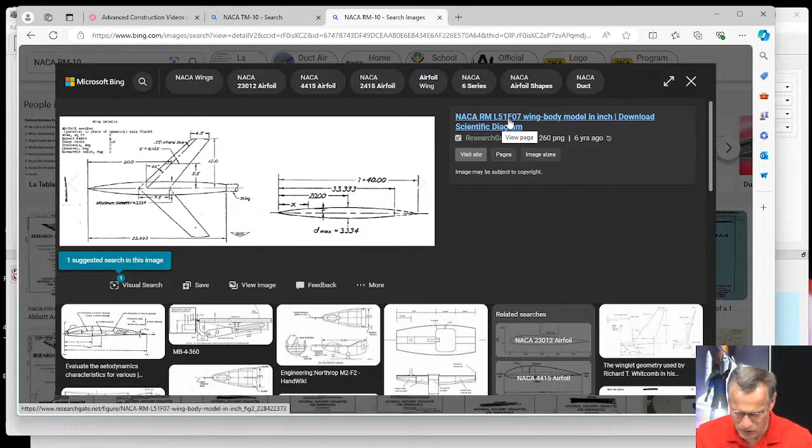What's this one here? RML51, it's a wing body model. The M2F2, that's a fun one - oh, we can't do that one in RockSim. What about this one here? Oh, that's another lifting body. That looks like the old National Aerospace hypersonic wave rider.

Terry asks, once I design a rocket, will RockSim alert me and say it's going to crash? Only if it's unstable. If it's stable, then you have to build it correctly.

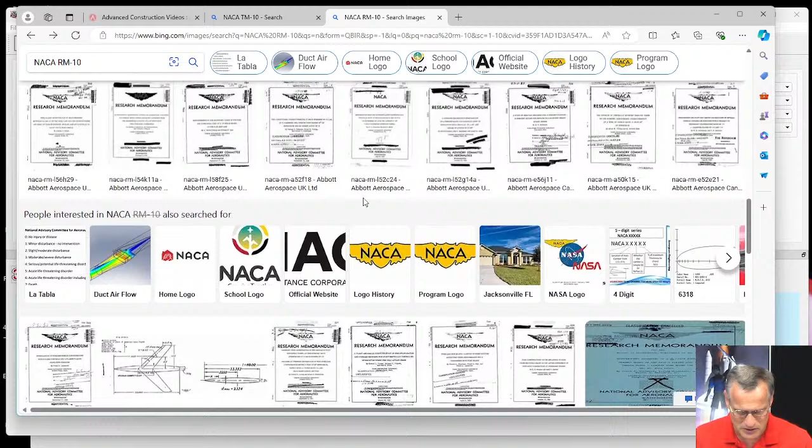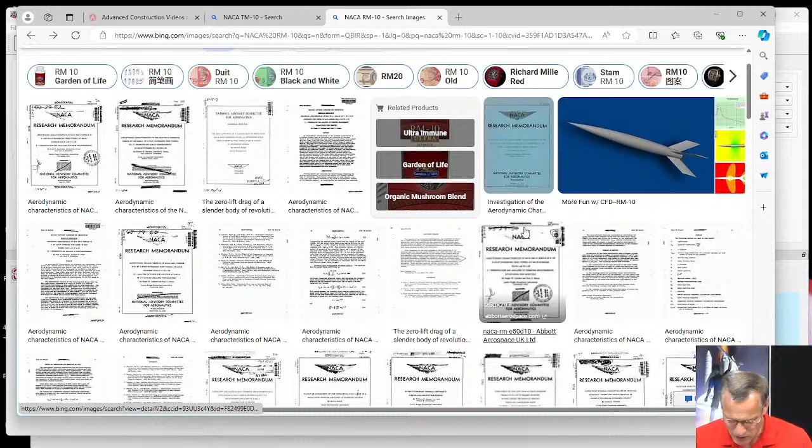There's a lot of NACA stuff here. I'm looking for this image, NACA RM-10. I'm not getting it - give me, if you know. What looked interesting was this one here, and this one - could you design that in RockSim? The answer is probably yeah, we could probably do that one. I'm just seeing if there's any RM10s here. Most all of these designs here can be done in RockSim. That one could probably even be done. That one can be done.

Let's try one, I'm looking for something interesting, so it's got to have a round body. Let's do a harpoon like that - let's visit that page. This is, somebody made a 3D model of it. The only question is, I don't know what the size is. They're selling this for $10. We could try designing this - let's give it a try.

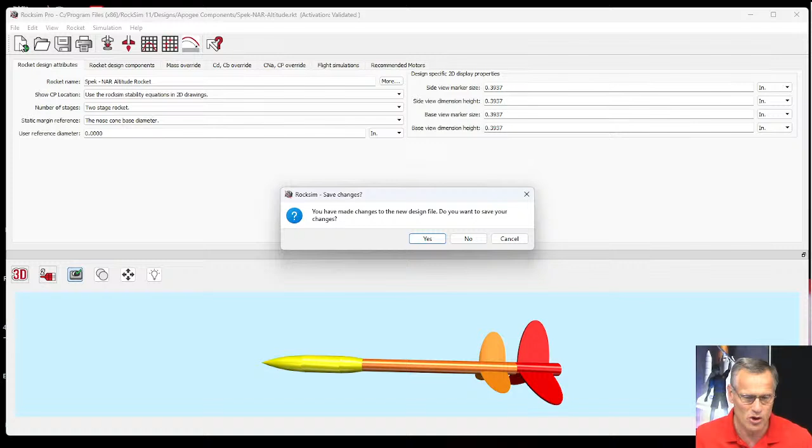So I'm going to go to RockSim. I'm going to be in RockSim Pro. Let me move this - oops, there's RockSim. I'm going to move this image from that screen to over here so it's not in the way, so I can see it, but you can't. Okay, to design a new rocket, we're designing a brand new one. Go up here to new, and it's going to ask if you want to save your previous design, and I'm going to say no.

Now we're going to start with a nose cone. We're going to go along these top tabs, and first is the rocket design attributes - this is a harpoon, so I'm giving it a name, military rocket, and I'm going to use the RockSim CP location, the number of stages. This is a single stage, so that's all I really need to fill out there. Then we go to the rocket design components - this is where we start adding parts. When you first start, everything's added to the sustainer, meaning it's the part that coasts to the peak altitude. When you start adding components, these are what you can select from over here.

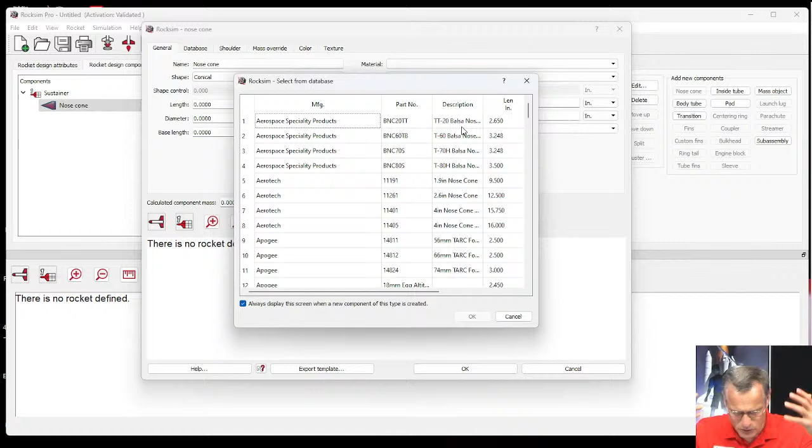I'm going to start with a nose cone. When you click on that, it always looks in the database first. Right now this database means nothing to me, so I'm going to close that, and this is the screen where we're going to design the nose cone. Let me just double check, make sure that I'm still with you here.

We need to select - we're going to fill out all this information here, but it's a lot easier to start with what size tube we're going to put this in. Let's say we want to put this into a BT60. If you're not familiar with rocketry nomenclature, BT stands for body tube, and this is the Estes designation. BT60 would be 1.64 inches in diameter, which if you've never designed a rocket before, you have no idea what these diameters are, but it's a common tube.

So I'm going here to the shoulder. Now the shoulder is the part of the nose cone that slides into the tube. And I'm going to choose what size tube that nose cone is going to go into. So that's what I'm going to do here. Choose a compatible body tube.

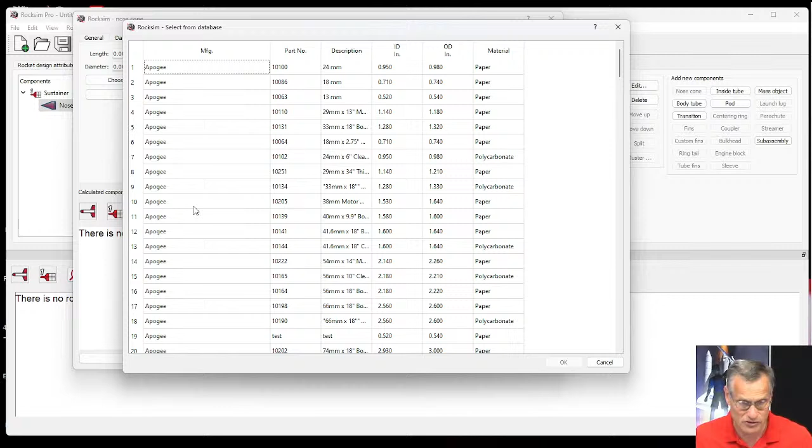Again, it brings up a list of tubes. So these are just tubes. And here is the manufacturer, Apogee. There's Always Ready Rocketry, Estes. So if you wanted to do a BT60, you'd come down to the description and you could look for BT60. And it tells me the inside diameter, the outside diameter, and what it's made out of.

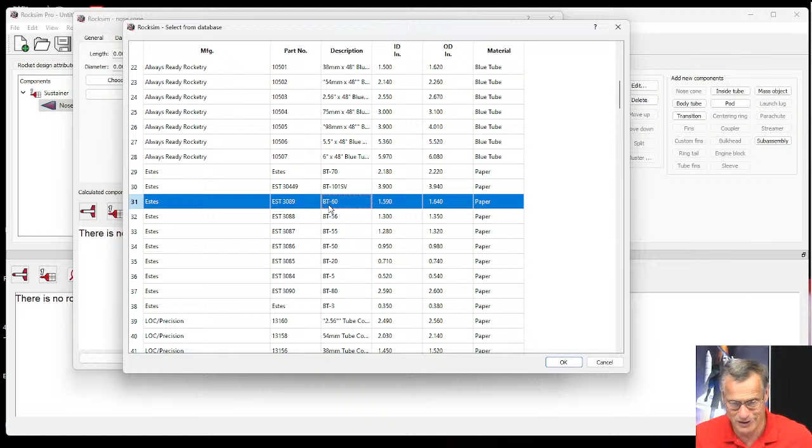So at this point, I don't really care what the diameters are. It's just I know I'm going to use that tube, and when I'm going to the store to buy one, I'm going to say, give me a BT60. And if the person on the other end is knowledgeable, they'll know what you're talking about. And if they don't know what you're talking about when you say BT60, call us at Apogee. We'll take care of you. We know what that means.

Okay, so I clicked on it, and I'm going to add. It says that this shoulder is going to go into a BT60. So what we're seeing right now is just the shoulder part. We don't have the nose cone part.

So I'm going to go back to the General tab here, and now we're going to start changing some of these parameters. For example, length, there's a slider bar here. You can just grab that slider bar, and you can see as I'm moving that slider bar, it's changing the shape of the nose cone. So now it's kind of sort of looking like a nose cone.

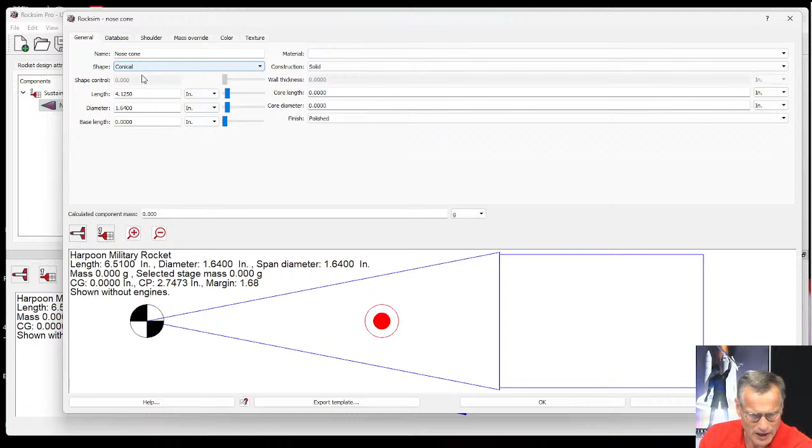And we need to select a material, and I'm going to choose, what would I choose? Let's choose polystyrene. I think this is going to be a custom rocket. So I'm thinking about, how am I going to make this? Traditional materials are balsa wood or plastic. And now with 3D printers, you might seriously think about printing a nose cone.

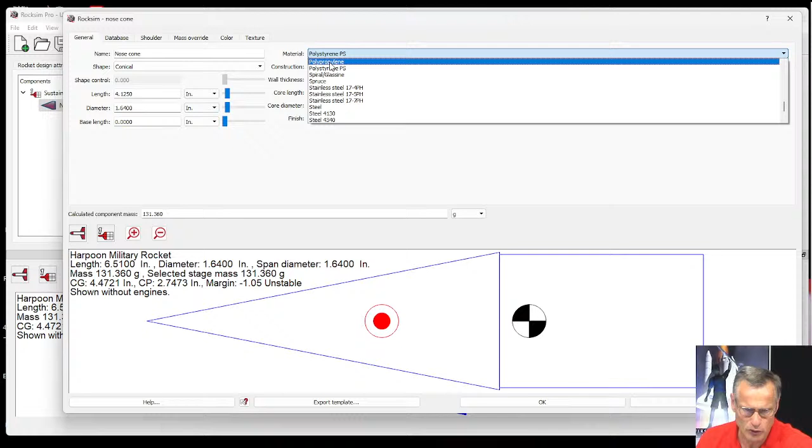And RockSim can help you with that. But the material, you have to select something from the list that has a density that's similar to what you're going to use when you 3D print it. And I guess we need to get some materials that have 3D printer qualities. But I think the closest for me right now would be either polypropylene or polystyrene. So that's why I'm going to choose polystyrene.

We could make it a solid nose cone, but I think we'll probably make it hollow. And if you're going to make it hollow, what's the thickness of the wall thickness going to be? So I'm going to say 0.06, and that's pretty beefy. When I did that, you'll see that my center of gravity moved.

It's going to be a polished surface. But now we're going back to our design here, and let's look at that nose cone. So it looks rather short. It's not conical. I would call that... we'll figure something out.

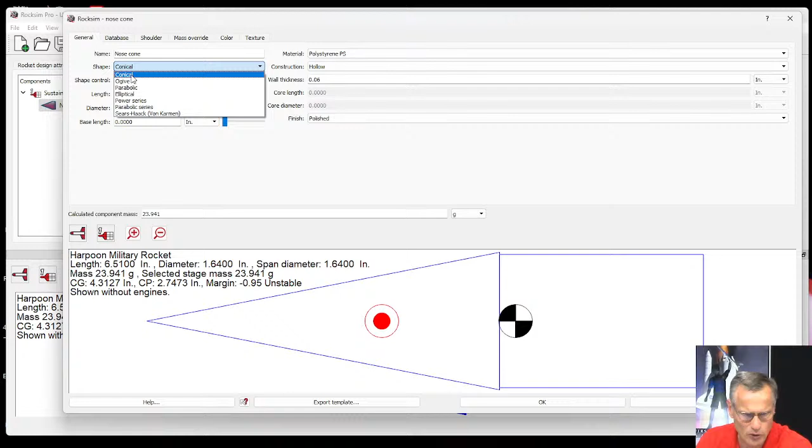So we're going to go to the shape. And here are the shapes we have to work with. So conical is what we have right now. Ogive looks like that, and that's closer to this nose cone here. But it's a lot shorter, so we need to make this nose cone shorter.

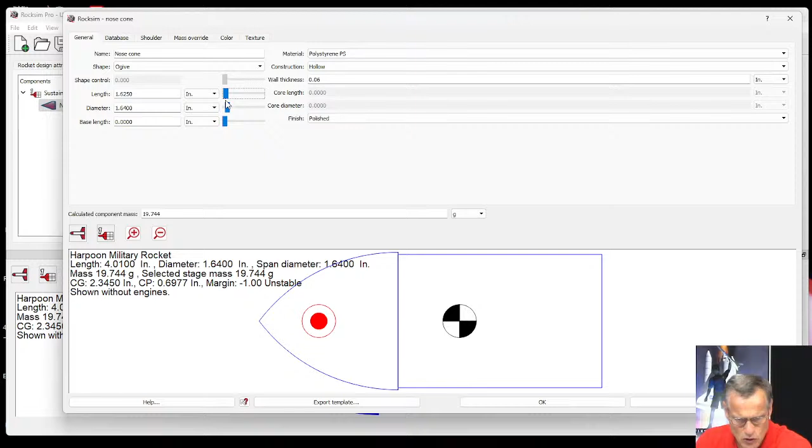So let me get that out of the way. Let's go here to the length and just slide the slider bar. Ooh, now that's not too bad, actually. Does it look like this one right here? Not too bad.

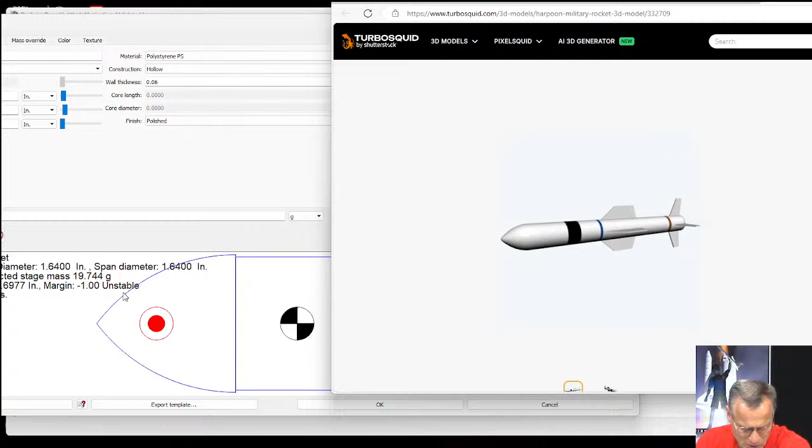Let's see if I can get this over here and bring that up. So we're comparing that nose cone with this one. The only difference is this one has a little bit of a rounded tip. And I can't round the tip in RockSim, but I think that looks okay.

Now, when I'm looking at this, it's kind of out of proportion. Oh, excuse me, the shoulder seems a little bit too long, so I'm going to shorten that shoulder.

So here's the length of the shoulder right here. Right now it's 2.38 inches. Let's make it 1 inch. So I'm just typing in 1 inch and hit the tab key. You can see now that I'm much shorter. I think I'll go a little longer. Let's make it 1.25. I can live with that.

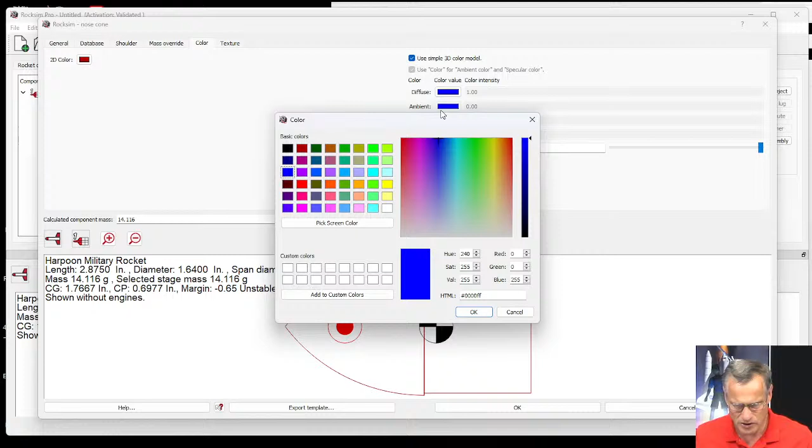All right, so that's a nose cone. Now let's give it some color. Right now the 2D color is blue, and I'm going to change it to that color there. And my 3D color is here, and I'm going to change it to white. Now click OK.

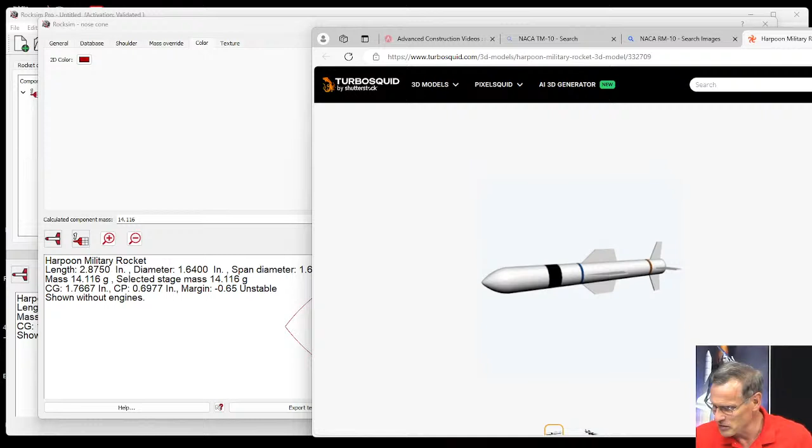Anyhow, so I made this nose cone, and I'm looking at it in 3D now because I changed the color to white. And that looks pretty close to this harpoon rocket, so I like that - let's use that as my nose cone.

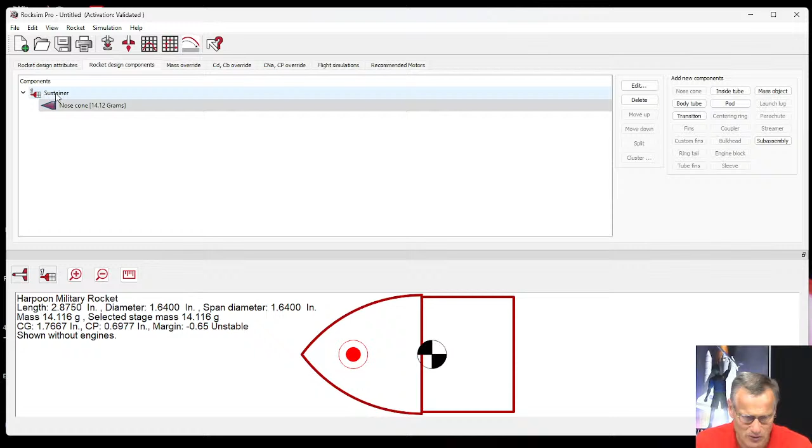So now we've added the nose cone, and now the next thing we're going to add is that body tube to the harpoon missile. I know it's a BT-60, so I'm looking for something that says BT-60, and that was Estes. Now the equivalent at Apogee is a 41.6 millimeter nose cone. We use actual dimensions, and that's the inside diameter of that nose cone.

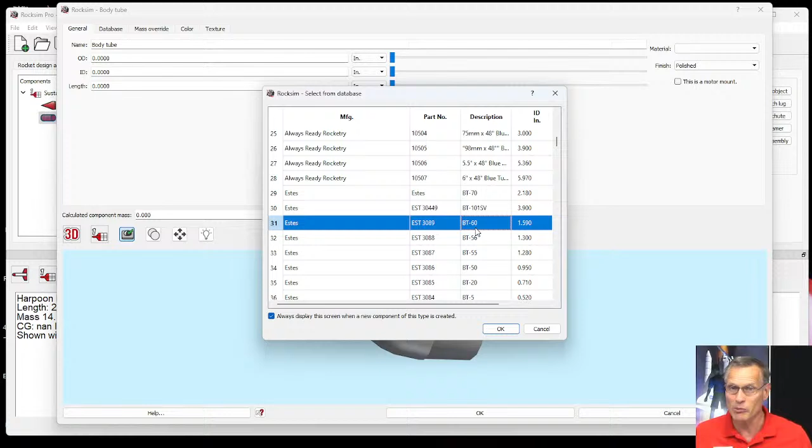BT-60 is... how did BT-60 come about, and why is it such an odd size? Well, when Vern Estes started Estes, he had a paper towel roll, and that paper towel roll he called the BT-60. I don't know where the 60 came from, but that size was the diameter of a paper towel roll back in like 1958. I think they're pretty close still to this day, but I wouldn't bet my life on it. But the dimension of that tube has stayed the same. The outside diameter is 1.64 inches, the inside diameter is 1.59.

So now we're going to select that tube and click OK. You can see it added the tube to our rocket. I'm just moving things around here so you can see it - this is in 3D. I'm going to go back to 2D over here, and now we're going to change the length. So now I've got to estimate how long this tube is right here.

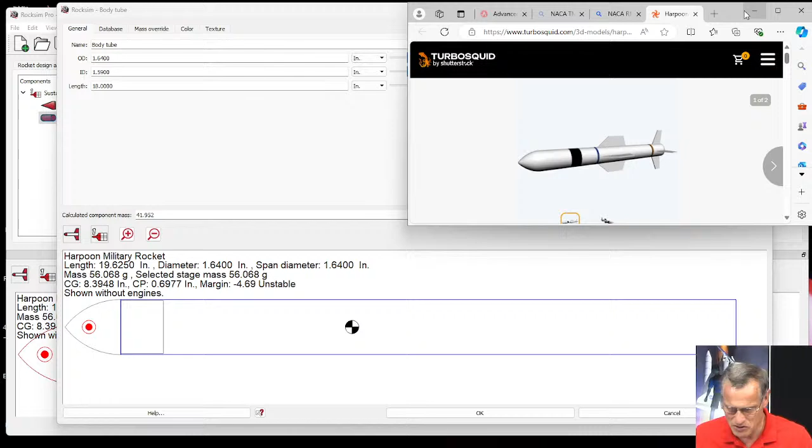I'm just doing a comparison by eyeball, and what I have here is actually not bad. I might extend it just a smidge - so I'm at 19 inches now. I'm just going through this tab - so the database, that's where we selected it from. The mass override: if this tube doesn't weigh what your tube is, then you would use a mass override, but we don't need to.

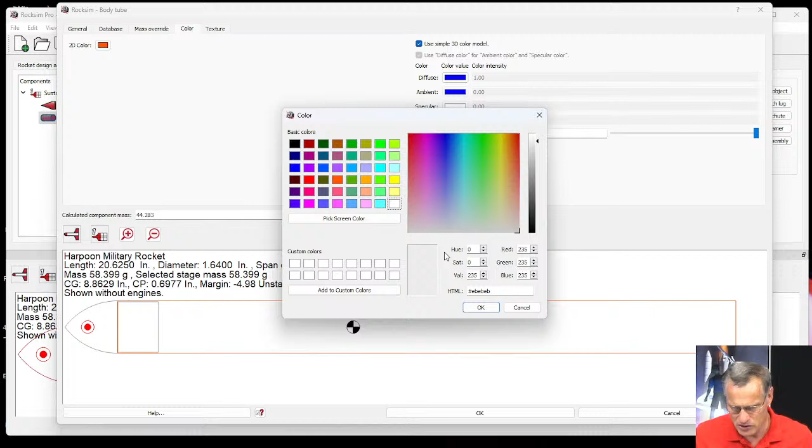The color - let's make it orange in 2D, and in 3D let's make it white, but what I want to do is make it off-white just a little bit, and I'll tell you why. So it still looks like it's white, but it has a touch of black in it. The reason I did that is when I'm in 3D, I want to be able to tell where the nose cone stops and where the tube starts. If I change that color to more white, all the way white, it's harder to tell where the nose cone starts and stops and the tube starts. By making it have a little bit of black in it, or any other color, it's just easier to tell.

And now I'm going to say OK. All right, so now we have our body tube, and now we're going to start adding fins. Now on this rocket we have 2 sets of fins - we have the fins up here in the front, and then down here in the back. So let's start with the back ones.

So what we're going to do is make sure the body tube is highlighted here, and then you'll notice that the fin button is highlighted. Now we have a choice of 4 different types of fins.

We have this one here, which will allow us to do trapezoids and ellipses. Custom fins allow you to do any flat fin shape, including trapezoids or ellipses. We have ring tails, which is kind of like a ring around the outside, and then we have tube fins, which are tubes glued around the central tube.

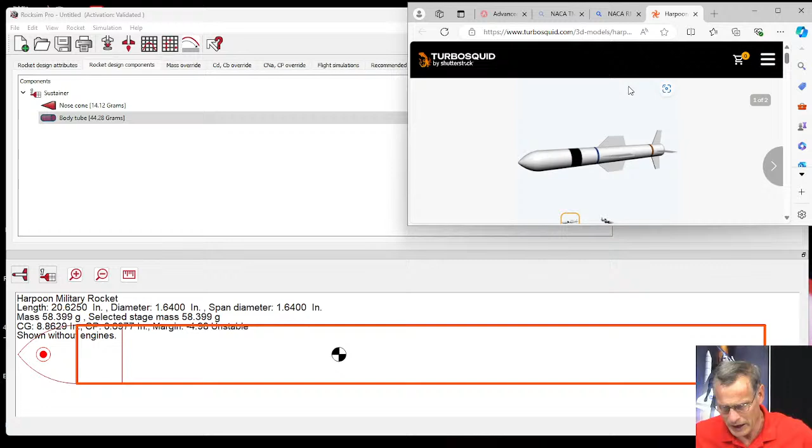So for this rocket, both of these fins are actually trapezoids, so I can use a trapezoid, just the regular fin shape for that, and I always recommend that. I know a lot of people like to use the custom fin shape for everything, but there's some advantage in processing power to just using the simple trapezoid shape.

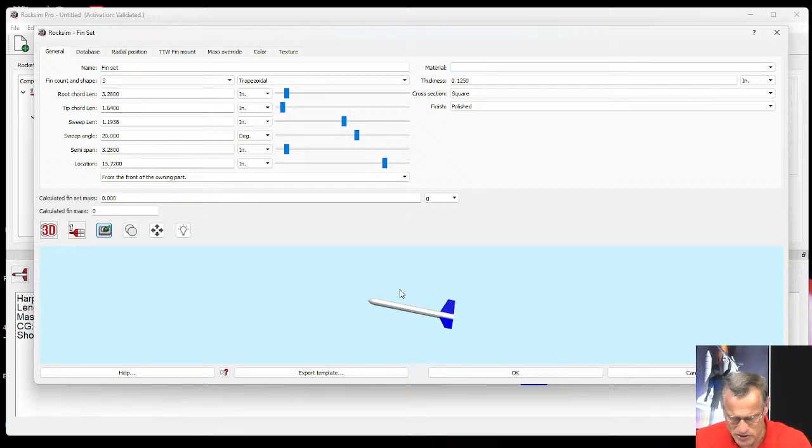So whenever you select a new part, it always looks in the database, and that's why this showed up here. I'm going to cancel out of that. And if you'll notice, when we go back to our design, RockSim has thrown a set of fins on there, just kind of as a starting point. So now we're going to modify those.

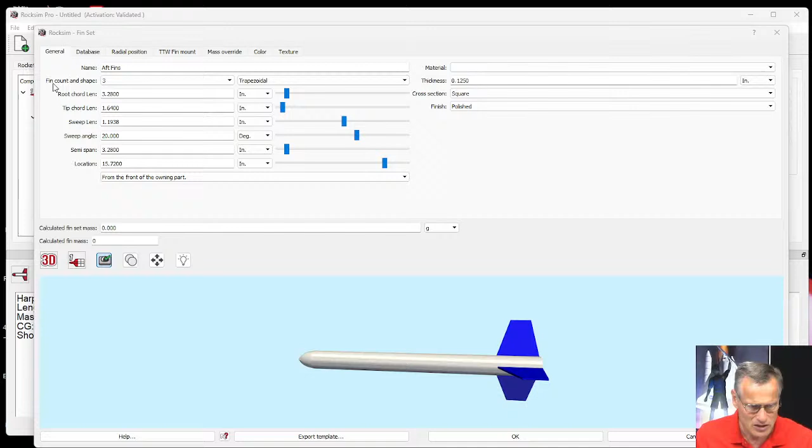Let me make this a little bit bigger here. We're going to call these the aft fins so we can tell them apart. If we look at our rocket right here, it has 4 fins in the back, and it also has 4 fins in the front. So I'm going to set my fin count as 4 fins.

And now we're going to start doing the shape. All right, so here is the root chord. Let's call this one, I'm just eyeballing it from what I'm looking at here, 1.5. Okay, the tip has to be smaller than that, let's call it 1.25.

The sweep, okay, so the difference between these two is 0.25 inches, so that's going to be my sweep length. So I'm going to put 0.25 in there.

What it does, let me go to 2D, is I know I want this back edge to be straight, because on this harpoon rocket right here, it looks straight up and down. So to get it straight up and down with these chord lengths, I know it's swept back 0.25 inches, it might be swept back a little bit more. Let's call it 0.35. And if that's 0.35, I'm going to make this 0.15 so that it's still swept back.

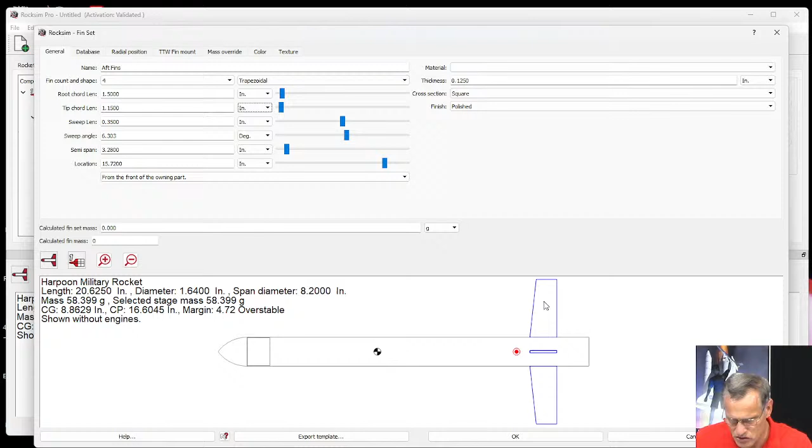Now I'm going to change the semi-span, which is this vertical distance right here. I'm just moving it down. I'll bring back the harpoon here. These are the only views that we have of it.

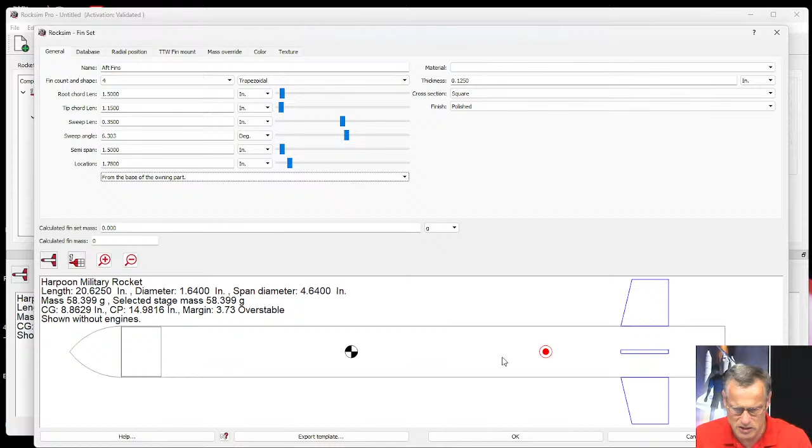So I like that. Now for its location, we're going to measure the location from the base of the owning part, which is this tube. On our rocket, it was at the very end, so that is the owning part. There's our fins. Let's go to the material, and let's make them balsa.

And the thickness, I'll leave the thickness alone. The cross section, let's say rounded. And you can see it rounded the edges. If you made it airfoil, you'll see that now it's an airfoil shape. But let's go back to just rounded.

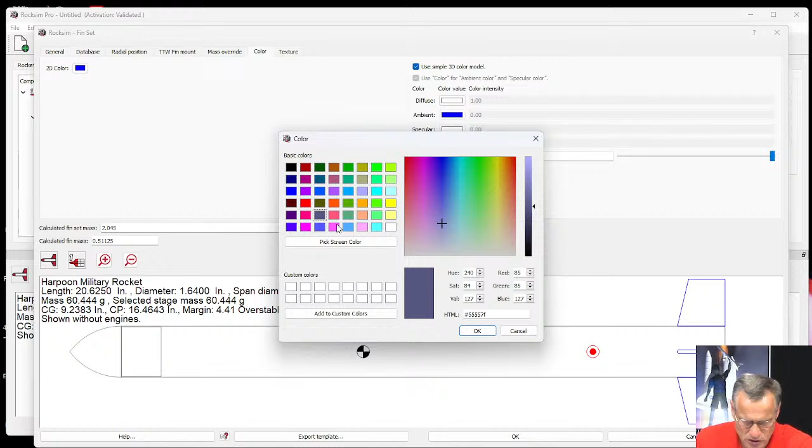These might be a little bit big, or maybe my tube is not long enough. Let's select the color, those are white. Yeah, we'll make it that color.

Okay, so there's my fins, and that's going okay. My face is on top of them, but I think you get the idea. There's the fins. Now, let's see, we changed the color, let's make sure that looks okay in 3D. Yeah, okay, I think this rocket might be a little bit longer.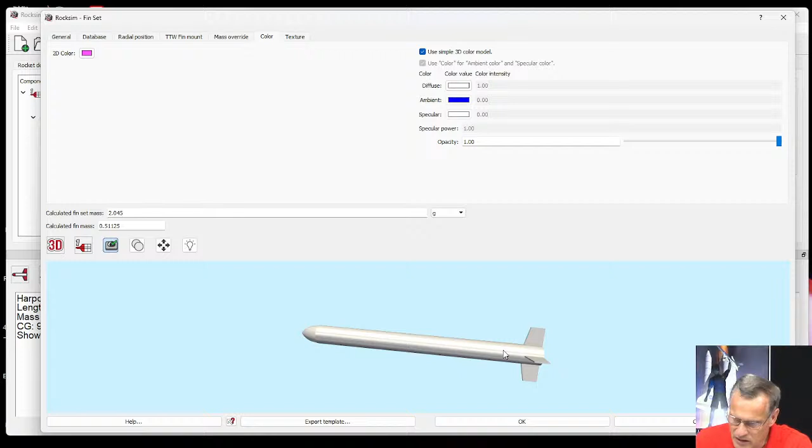My fins are too big. Okay, we're going to say okay to that. So those are the aft fins. Now we need to do the front fins.

Again, there's 4 of those, and these look longer, and they don't look quite as tall as the ones in the back. I'm trying to move this by grabbing my bar, I'll grab it there. Okay, so let's add another set of fins. We're going to click on the body tube, go to fins again, and I'm going to cancel out of the database.

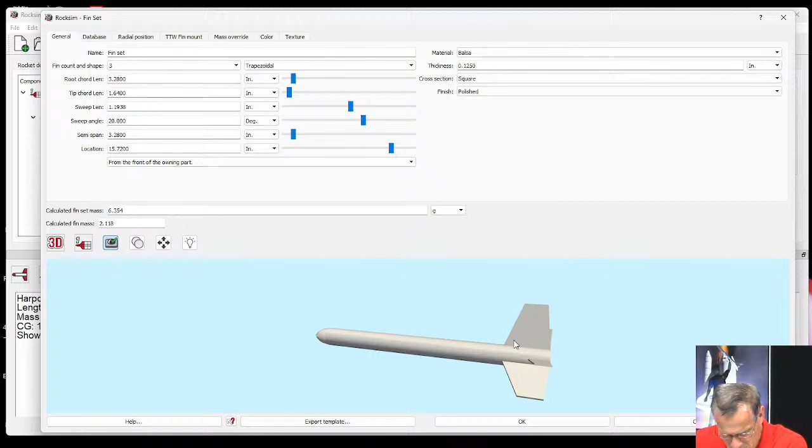Okay, so I was saying, where are my fins? Well, what happened was, if you look closely, there's 2 sets of fins here. There's this one we just added, plus a new one, and you'll notice it's very similar. Here's our first fin, and here's our second fin. It chose white because it remembered my previous color was white. I could live with that, but on this particular fin it was very hard to tell.

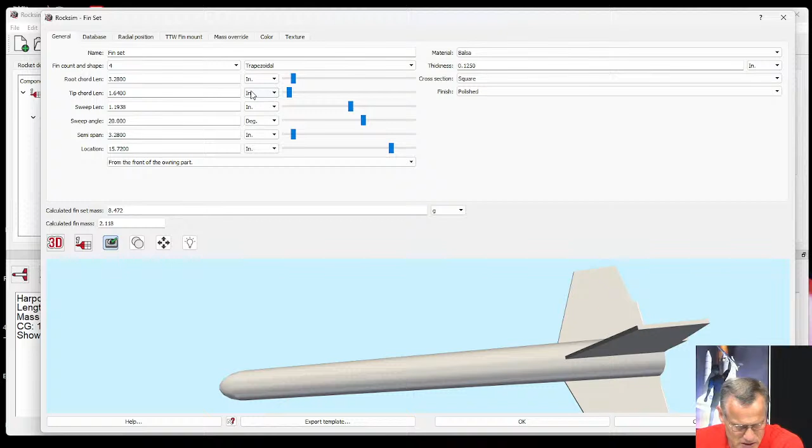But we know there's 4 of them, so we're just going to do like we did before and start changing things. A semi-span... okay, so now it's a little bit shorter. I think that's okay. Let's move the location, slide it up here.

It is looking more and more like a harpoon. I'm going to make these a little... oops, I want to make the semi-span just a smidge smaller.

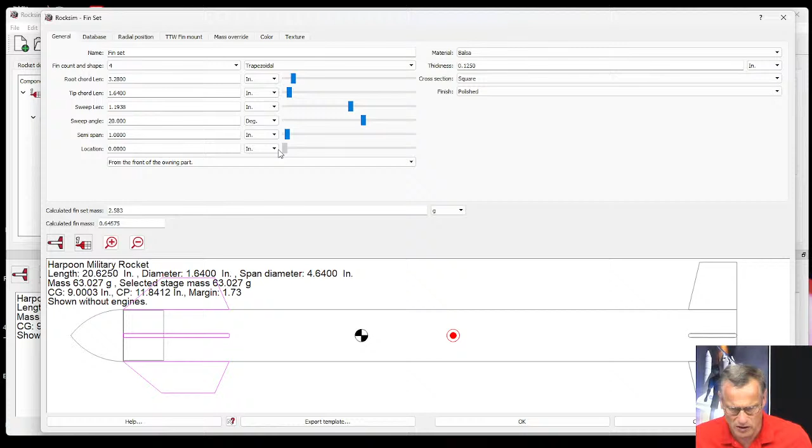The reason for that is I know fins in this position make the rocket less stable. If I go to the 2D view, you can see that before I added these fins, the center of pressure, this dot right here, was somewhere back here. But when we added this other set, it moved it forward. And you'll notice that when I move those fins forward, the center of pressure moves forward as well, and at some point it would overtake the center of gravity. But we're not there yet.

So I'm going to put them right there. And is my shape okay? That's my question. It looks not too bad. I think I'm going to live with that.

The only thing I might change is this sweep angle here. Oops, too much. I'm just tweaking it just a smidge. So I like that, it's a good shape.

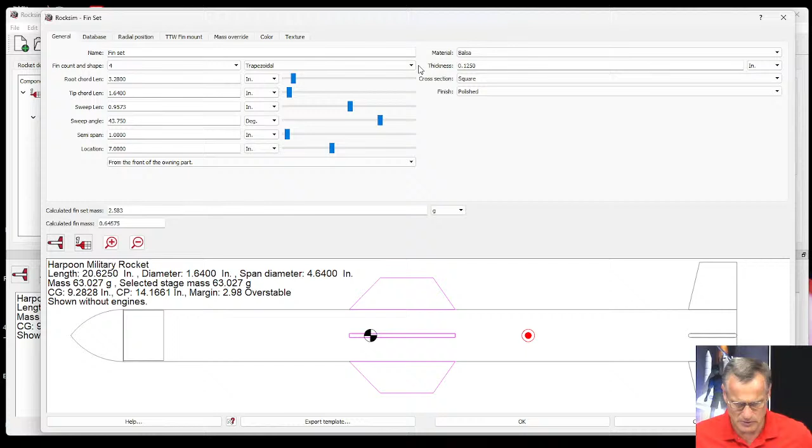I'm going to go to my color tab. I'm going to make the 2D color a different color, so it's a little lighter but you can still see it.

Next, let's click OK to those fins. I'm going to save my design, put it on the desktop, and let's call it the harpoon. Hit save, just never hurts to save things, right?

Okay, so now we're going to add the engine mount so we can put a rocket motor in it. I'm going to click on the body tube, and it allows me to put an inside tube in there. Again, it looks in the database, and we're going to cancel out of that. I'll make this screen bigger so you can see it.

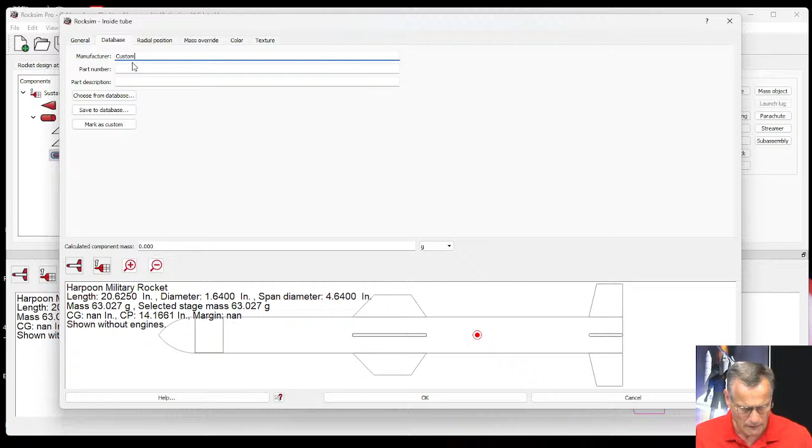Okay, so we need to select a tube, and I'm going to go to the database. So why is my database not opening up? Is it behind? Choose from database... okay, there it is.

Okay, so now I know it's going to use, I could use a BT, an 18 millimeter or a 24 millimeter diameter rocket engine. I'm going to go with an 18 just to keep it from going too high. And I'll click OK on that.

So here's our tube, and it's this blue one. You can see it's really long, and we're going to change the length of that. I'm going to start by changing it down to about 2.5, 3.5 inches, somewhere in there. Okay, 3.5 inches, so right now it's right here. Let's change the location, measure from the back of the part, and make it 0 inches from the back of the tube. You can see just by doing that, it moved it all the way back here.

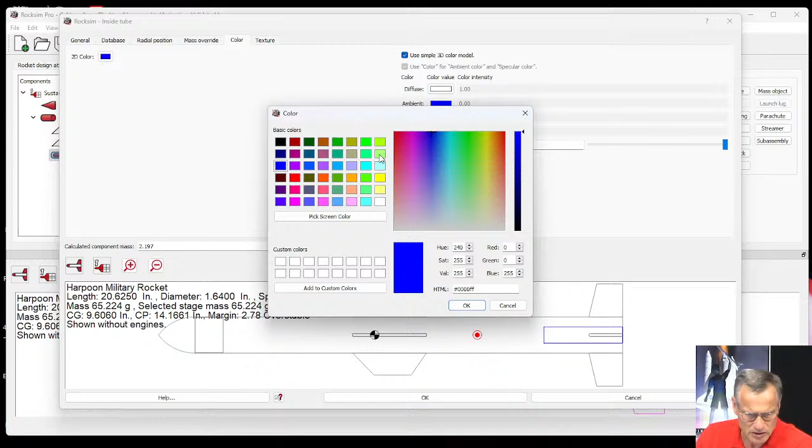It tells me the material is paper. Color, let's make it also white, 2D color, make it that color there. Okay, so there it is.

Let's go back to the general tab. Now this is going to be a motor mount tube, and by checking this box right here, we're telling RockSim that when we put a motor in it, this is the tube that it goes into.

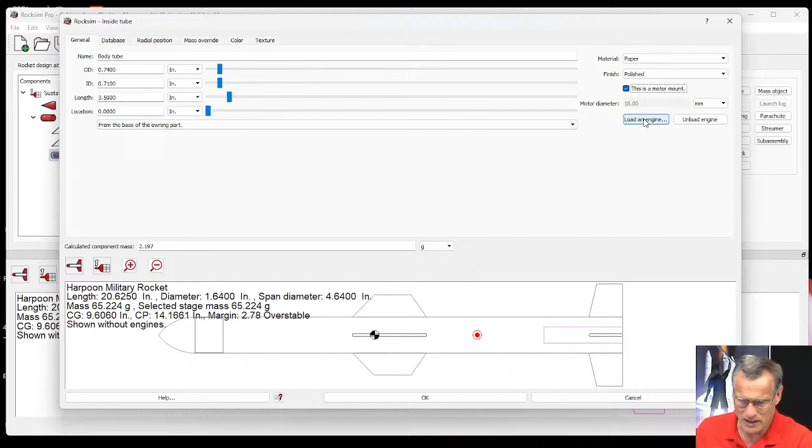And at this time, we can also actually add a motor, and it's actually a good thing to add a motor as you're designing, because it moves the center of gravity backwards, and we're always concerned about the relationship between the center of gravity and the center of pressure. That center of gravity has to be in front, towards the nose.

So when you select the motor, what you want to do, if possible, is put the biggest one in there you can. Why the biggest? Because the biggest one is the heaviest, and the heaviest is going to move the center of gravity further back. So from my list here, I can go all the way up to a D24. It doesn't tell me my weights, but in general, D motors are heavier than C motors.

So I'm going to choose that Aerotech D24. I'm going to change it later when we run simulations, but I'm just looking for the weight right now. And the ejection delay, we'll just go with a 7.

It's going to hang out the back 1/2 inch. So engine overhang, which you see right here, is how far the engine is going to hang out the back. I'll say OK, and you can see now I put that engine in there.

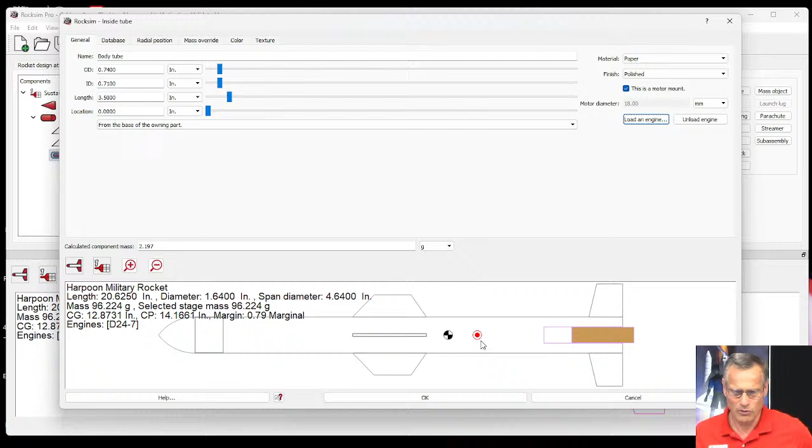We'll also notice that our center of gravity, which used to be in front of these fins, is now back behind those fins. And this is what we are really concerned about. If that center of gravity gets behind that center of pressure, this rocket's going to go unstable. And we don't want that to happen, so that's why we wanted to load an engine in there.

So I'm going to say OK. Now we need some centering rings on that engine mount tube. So I'm going to select the tube and hit centering rings. And again, it looks in the database, but I'm going to cancel out of that.

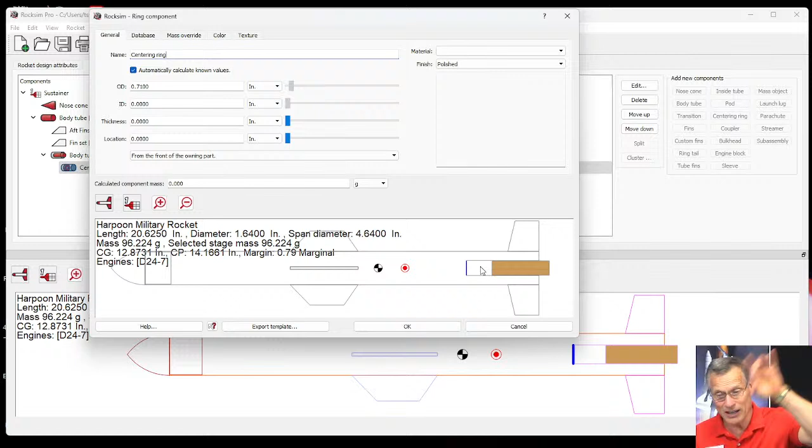What we noticed here was that this centering ring is inside the tube, and we want it on the outside of the tube. So I'm going to cancel out of that. What that tells me is I've got the wrong tube selected.

So I'm going to go back up 1 tube, which is our BT60 size tube, and I'm going to add the centering ring right there. So centering ring button right there. Again, it looks in the database. I'm going to cancel out of that.

So now my centering ring is this dark blue line up here at the front. Let me make this bigger. So it's right here, and you'll notice that we have an outside diameter, but we have no inside diameter. And the reason we don't have that is because we've got this check that says we're going to automatically calculate that inside diameter based on its position in the rocket.

So watch as I move the location of that ring. So here's the ring. Let me make it a little bit thicker here. I'll make it 1/8 inch. Let's say it's plywood. So there's the ring. We still don't have an inside diameter.

But when I move that centering ring back, and when it gets over the top of the engine mount tube, you'll see that that inside diameter number is going to change. So I don't need to know the dimensions, I just need to know where it's located. So now we do have an inside diameter of 0.740 inches, and the only thing that we don't have selected is the material.

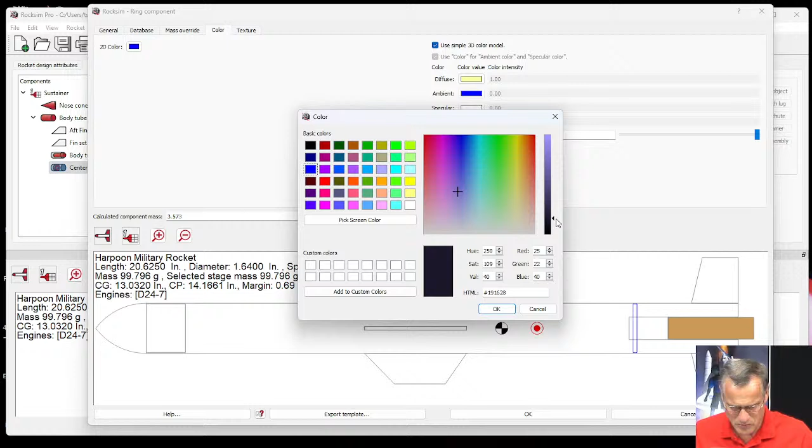Let's make it a little bit yellowish in 3D, and in 2D I want a nice dark color. That's total black, so here's a deep purple. Click OK. So there's our first ring.

Now we need another ring in the back, and let's click OK. The easiest way to do things is just to do a copy and paste. The only thing that's going to change is the location.

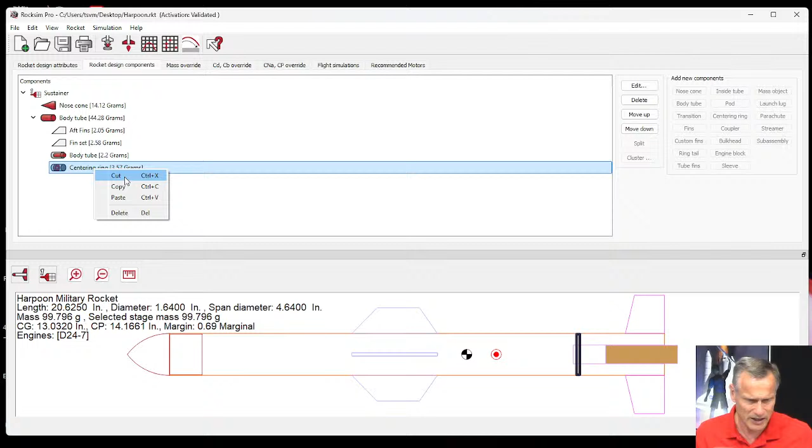So we're going to highlight it, and then do a right click and say copy. Then come up here to this tube, and we're going to paste it in that tube. Right click and select paste. And now it did add the second centering ring, but its location is exactly on top of the previous one, which is why we're not seeing a second ring in the drawing.

So as soon as we edit one of those rings, we're going to call this the front centering ring. Here's the location right now. It's measured from the front of the tube.

I'm going to move it back to here. I want to recess just a little bit inside this tube. The reason we do that is just to make it easier to put the engine clip on. So that's why.

All right, so there's our ring, and we call it the front centering ring, so we can tell it apart from, well, it's actually the back centering ring. Aft centering ring, click OK. Okay, so now we have that ring in there.

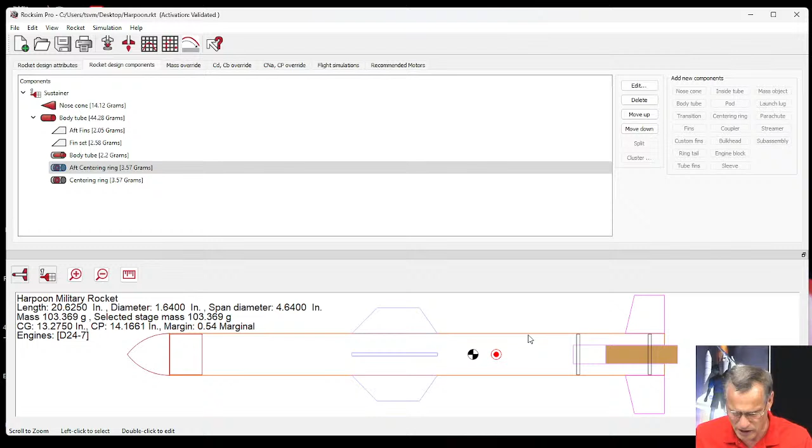The next thing we need is a parachute. So let's add a parachute. Where is this parachute going to go? I want it to go in this tube. So you can just click on the tube, or you can click on the name up here in the parts list. Now I want to add a parachute.

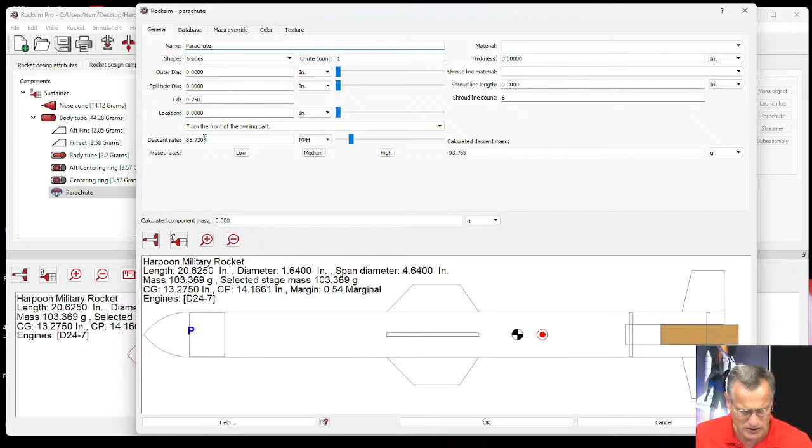So I'm coming down here to parachute. Again, it looks in the database, but we're going to cancel out of that, and we're going to estimate it. So right now it says the descent rate is 85 miles per hour. Let's put that in meters per second, 38. I'd like to see that number under 20. So what it means is I need a bigger parachute than what I have.

And so here's our parachute. What we actually have is a parachute with a 0-inch diameter circle, which doesn't exist. So let's make this bigger and see what happens.

But while we're doing that, I'm going to select the material as low-density polyethylene, which is what garbage bags are made out of, if you don't know what that is. And the shroud line material, we're looking for thread or something really tiny. Okay, here's carpet thread, carpet string. And we need a thickness of the parachute so it has some mass, so let's call it 1 mil.

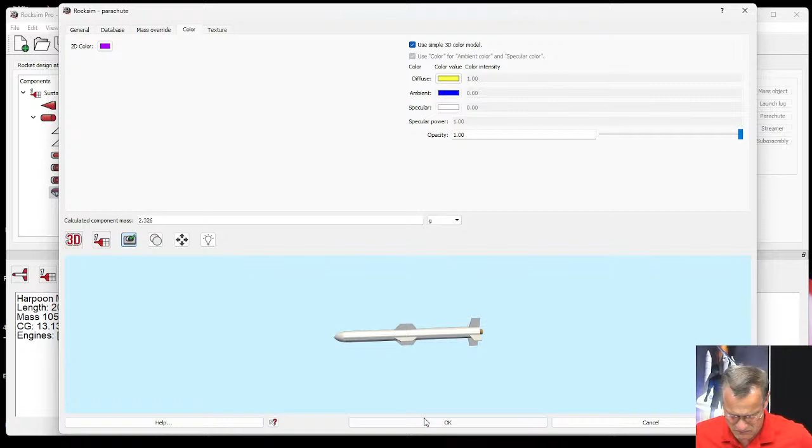Okay, and let's change the color. So the 2D color, let's make it purple, and the 3D color, let's make it yellow. Right now you don't see much difference in the 3D. I can't see what color my parachute is because I can't look through the tube. But I'll say okay.

Let's see if I go here. Okay, so here's my parachute right now because it's highlighted, and that's my parachute. If I click off of it, and I selected the tube, now the tube's highlighted. If I click off of that and click on the nose cone, now the nose cone's highlighted. All right, so we got a parachute.

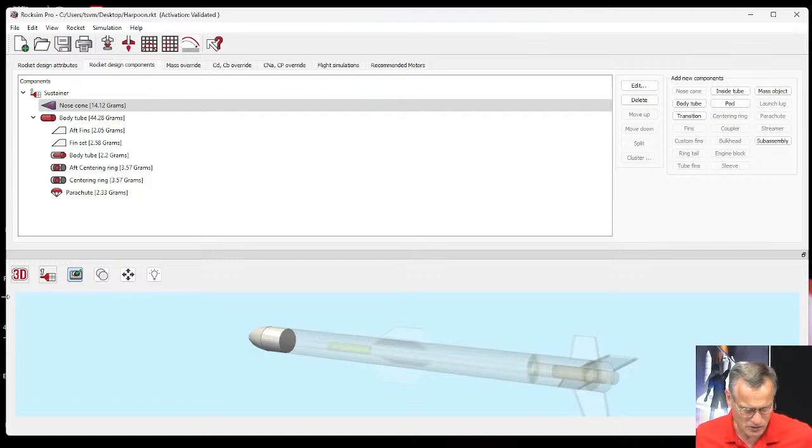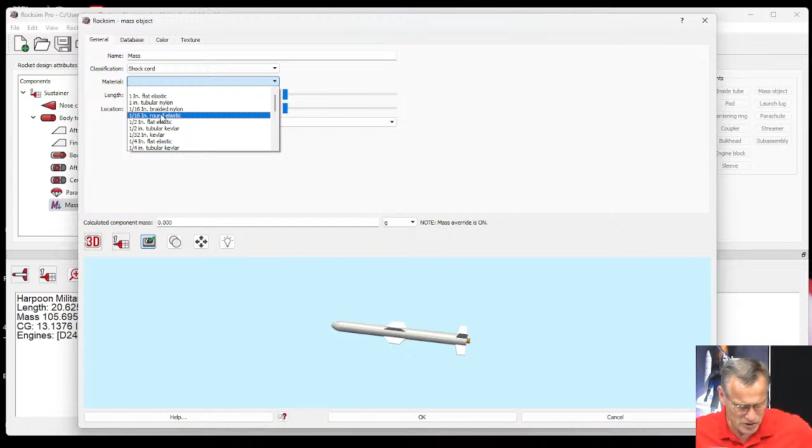Let's add a shock cord. So for a shock cord, you'll notice here there's no buttons for shock cord, but you can choose a mass object. A mass object is anything that doesn't have a defined shape but has mass. So I'm going to cancel out of the database, and I'm going to say that instead of being a general shape, let's call it a shock cord. And for this, I want to use 16th inch braided nylon.

And the length of that, so as I'm changing the length, the mass is going up. I'm going to probably want like a 36 inch, somewhere close there. And its location, if I go back to 2D, right now it's right here at the front of the nose. Normally you put it near the parachute somewhere. It's just more convenient there.

Okay, so there's my mass object, which is the shock cord. Let's call it the shock cord mass. Click OK.

Next, okay, we added the shock cord. We need an engine block. So this right here is the inside tube, and you'll notice the icon is different from the outside tube. When we click on it, it highlights the tube in the drawing. But we want to actually change that.

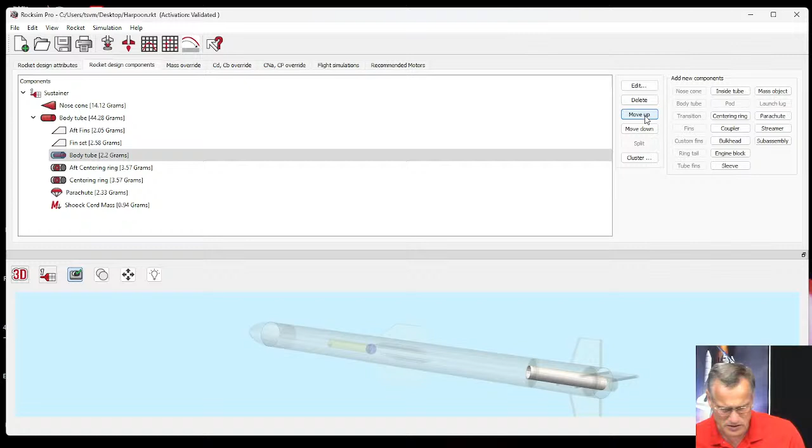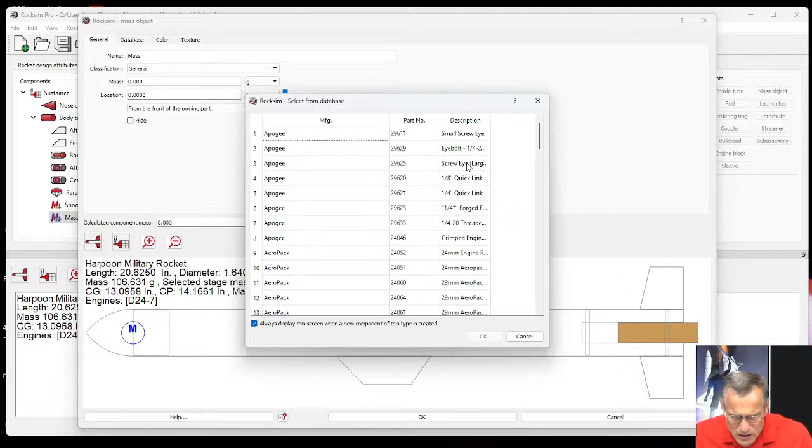This is, what did I say, that we're adding a mass object? I didn't add any mass objects yet. So I need to select the body tube that the mass object's going into, then click on the mass object. This is, not a screw eye, it's the crimped engine hook.

Right now it's right up here, and let's move it to the base of the rocket. I think that's actually pretty good. I'll put it right there. So that's going to be your engine hook because we don't have a defined shape for an engine hook here.

So, crimped engine hook, let's click OK. Okay, so this rocket is ready to launch, except it doesn't have a launch lug. So let's put a launch lug on there.

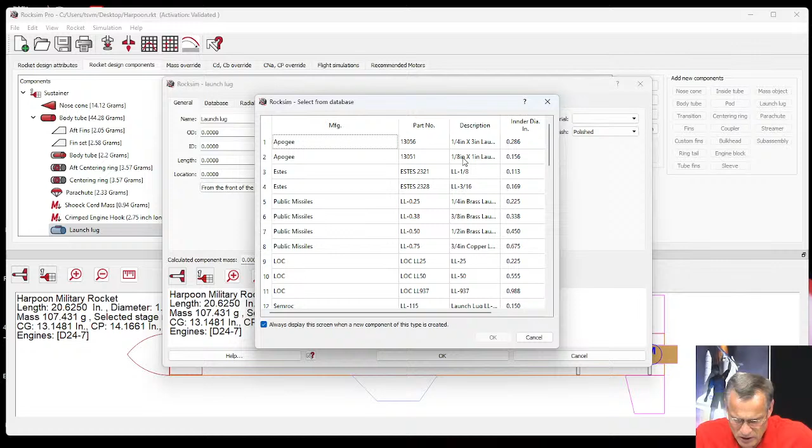I'm going to select the body tube because that's where it's going to be attached. Come over here to launch lug, and I'm looking for an 1/8 inch launch lug. Click OK, and this screen will allow us to edit that launch lug.

So right now it's here at the nose cone. Let's move it back down to about here. Normally you want it on the center of gravity, because that's the point where the launch lug is strongest, since it would take a lot of force to kick it off.

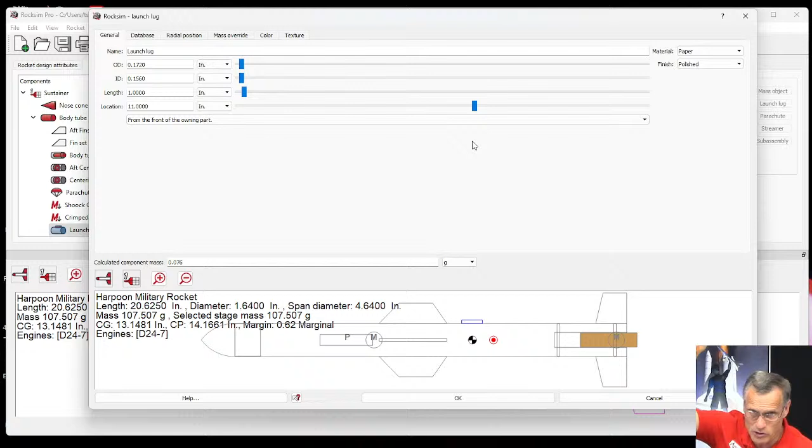Normally when you put it down on a launch rod, that is where they snap off. So if you put it as close to the center of gravity as possible, it's the least likely to snap off there. If you're using 2 launch lugs, span the center of gravity, putting one in front and one in back, and that will give you a nice strong launch lug.

Let's look at this from the base. So I'm going to go to a base view right here. And you'll notice that my launch lug is interfering with these fins. So that's where you go to the radial position tab, and you can just slide it around the tube. Let's call it 45 degrees, because it's got 4 fins.

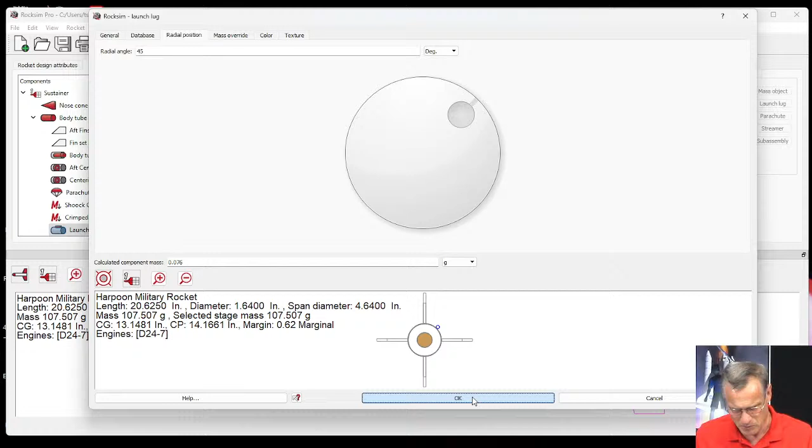So there's my launch lug. I'm okay with that, except for maybe the color. So let's make it white, and in 2D it doesn't really matter. I'll make it nice blue, click OK. So we're looking at the base view of the rocket, and click OK.

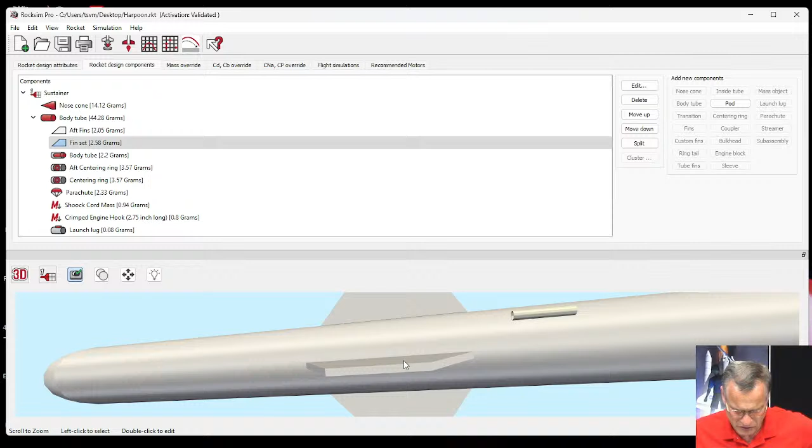I'm trying to find that launch lug, there it is right there, right where I left it. All right, so at this point, the rocket is actually ready to fly. So let's do a flight simulation of our brand new rocket.

And we're going to go to the simulation properties. This is where you load your rocket motors, change the weather condition, and change the launch site. So I'm going to hit choose engine. All right, so now I've got to really pick a motor.

So I think I want to get an Estes C6-5, because I've flown those before and I know what to expect. So I'm going to choose a C6-5.

The ignition delay is like when you hit the launch button, how long does it take for the rocket to actually move. Well, we want it to move right away, so we're going to leave that at 0 or blank. The engine overhang, again, is how much it hangs out the back. We're going to say 1/2 inch, and I like that. It's okay.

The other thing that we want to do is confirm that there's no other impediments to this launch.

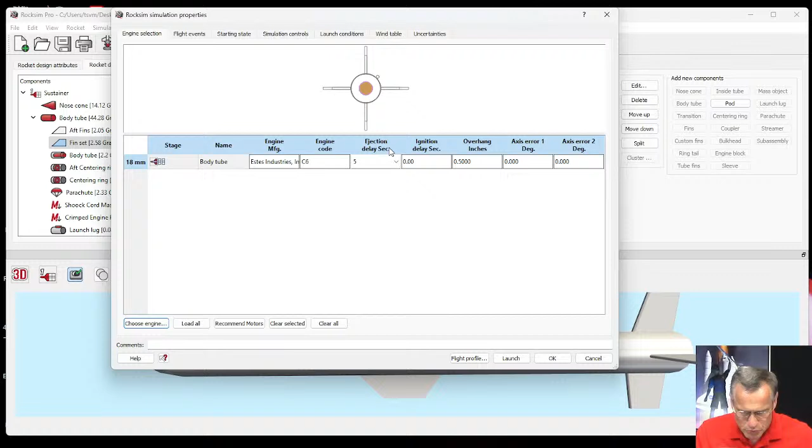All right, so under flight events, we have one parachute we have to deploy, and let's deploy it at the maximum engine ejection delay. Test criteria, just leave that alone. The values, leave that alone. Click OK there. What I wanted to do was go to these.

Okay, so these are the other conditions. So our starting state, we're on a 72-inch launch rod, that's 6 feet. It's probably a little tall for this rocket, so we'll drop that down to 36.

The launch guide angle from vertical — if you move this around, you can see I'm moving my launch angle around. Let's do it at 31 degrees from vertical.

The azimuth angle, think of this as a compass wheel. North is at 0 degrees, and that's straight up. East is out here, at 90 degrees. South is 180, and west is 270. I don't know where I'm launching this thing from yet, but that's going to make a difference. For right now, we'll just leave it at 0, meaning we're angled toward the north. So we're 31 degrees from vertical, angled exactly north.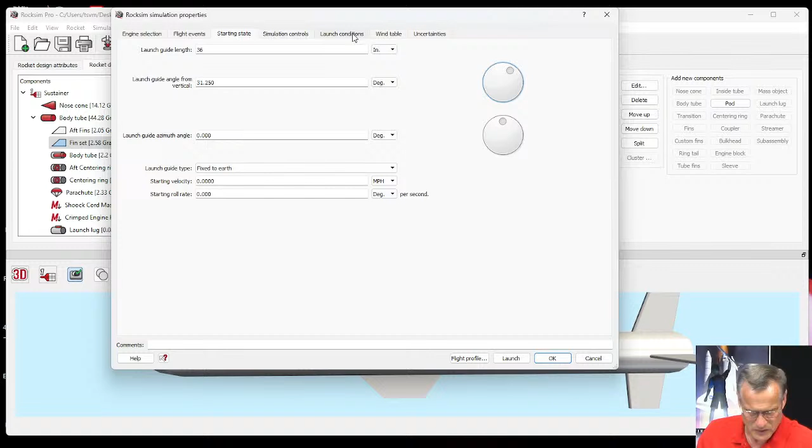Okay, so that was the starting state. The simulation controls are how RockSim runs the simulation, and I just recommend that you leave it alone. Launch conditions, this is our altitudes and wind speed and pressure.

I'm not sure where this launch site is, so I'm going to choose a launch site, and it looks in the database, and I've added some. In your database, I realize you won't have any. I'm going to choose Pueblo, Colorado, click OK. Here is the parameters for Pueblo, Colorado. It's at 1,644 meters above sea level, and once you get up there, it's flat, so our landing zone altitude is the same. If you're launching from the top of a mountain and you know the rocket's going to come down the mountain where it lands, you can change that, but normally just choose the same number.

Here's your relative humidity, pressures are right there, and I'm not going to change any. Those are going to be fine for me.

Next tab to go over is the wind table. We have a 0 mile per hour, or 0 meter per second wind at an altitude of 0. So right at ground level, there's no wind. At 40,000 meters above ground level, we have a wind of 5 miles an hour coming out of the 120 direction. So 120 is between 60 and 180, so it's going to be coming from the southwest or southeast.

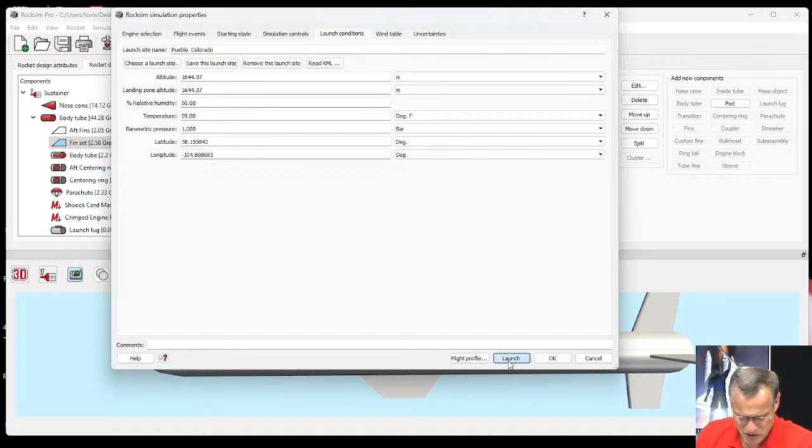All right, so now we're going to launch this rocket and see what it does. Okay, so it gives us a result, and the result said that the parachute did open, but it's got an arrow in it, which means the parachute was opening when the rocket had come over the top and was starting to come down.

It reached 135 meters, deployed a little bit... actually deployed higher. Oh, no wait a minute, this is the deployment, this is the maximum altitude. So the maximum altitude is 138.4 meters, and it deployed its parachute at 135.21. So this is really close to apogee. That's picking motors pretty good.

All right, I better check over here. Come on.

Terry says, what's with the ads interrupting the stream? Well, that's what YouTube does. They want their money too.

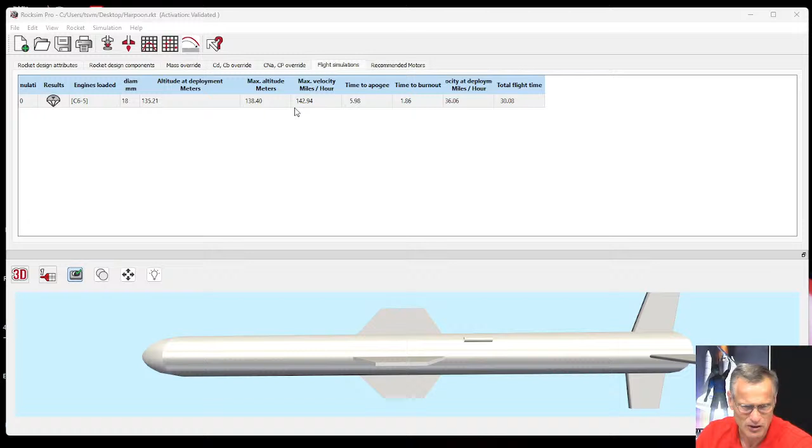All right, so we launched it, but we got some altitudes, but what does it really look like? Can you tell a lot from the launch just by looking at this number here and that number there? This tells us that it came over the top and deployed at 135 meters, but what does it look like? To see what it looks like, you click on this right here, and this is the flight profile button.

When you click on it, it opens up. I'm in RockSim Pro, so it's opening up a viewer to see the trajectory. The RockSim Pro viewer is a 3D viewer, so everything's in 3D, where RockSim itself is only a 2D viewer. That's kind of the major difference.

So you can kind of see we've got the rocket, our Harpoon rocket, and we launched it at an angle, and we said we launched it straight north. So here's our compass right down here. I'm going to move north up to pointing to the top, and now we can see that, yes, our rocket is pointed to the north.

So that's good. This cone right here is called the weathercocking cone, and it kind of gives us the altitude. Why does it do that? How high the rocket's going to go. So it's going to go approximately that high in this view.

It's going to start out here, and you can see in the distance, the mountains, because it's Colorado. So I'm just changing it around. So our rocket is launched from that little tiny red dot right there.

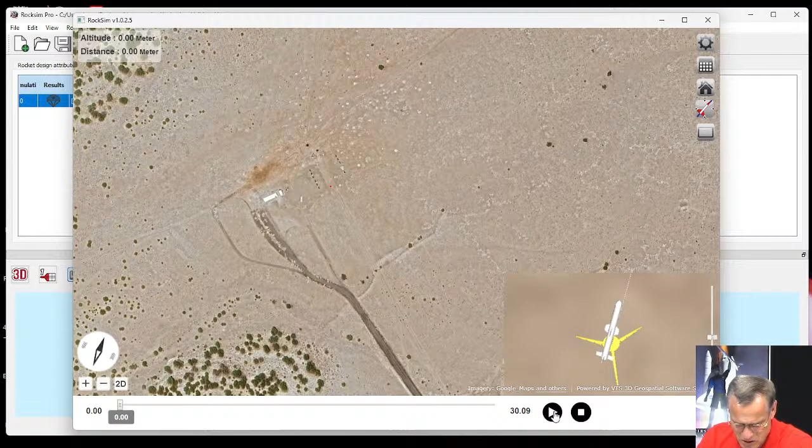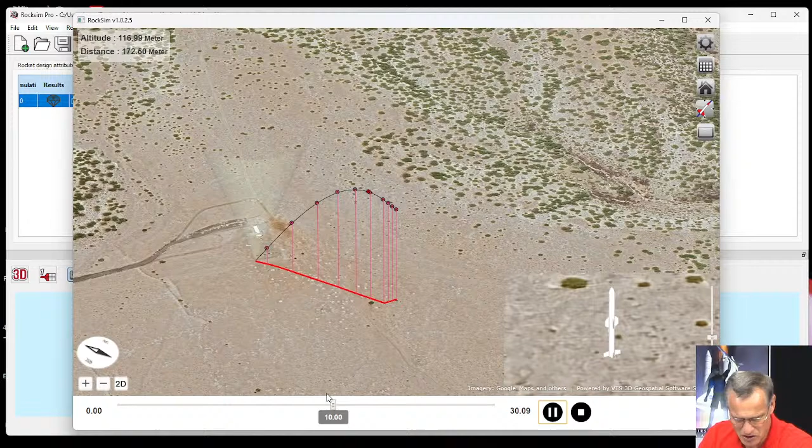And if we click the launch button here, we'll see the rocket taking off. It's going up, and we aimed it to the north, and yeah, it's going mostly... north is this direction, this diagonal, and that's the direction it took. Then what happened there is we got a wind coming out of the southeast that's pushing our rocket towards these trees, and there's a canyon here. This is our canyon, but the rocket actually landed well short of the canyon. If you want to speed things along, you can just take the time slider here and move it forward into time.

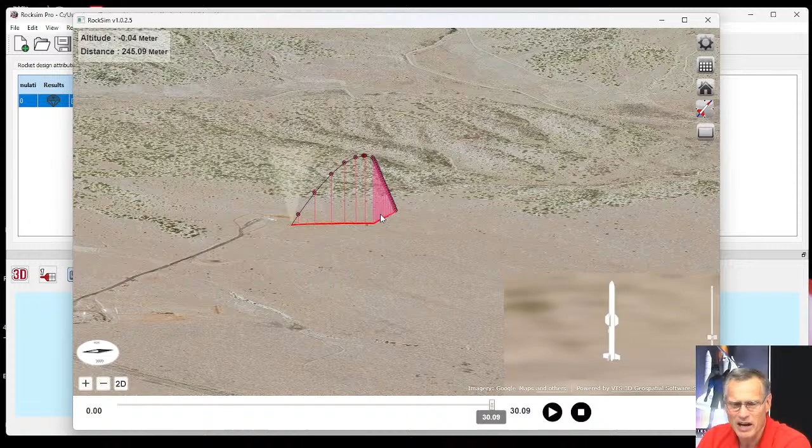So that's the trajectory, and it's not a bad one, but it's not the greatest either. I would like to see... you see the weathercocking cone right here? I like to see the apogee point, the highest point in the flight, to be inside of that cone, and we're well outside. So that's the thing I think I would change on this flight.

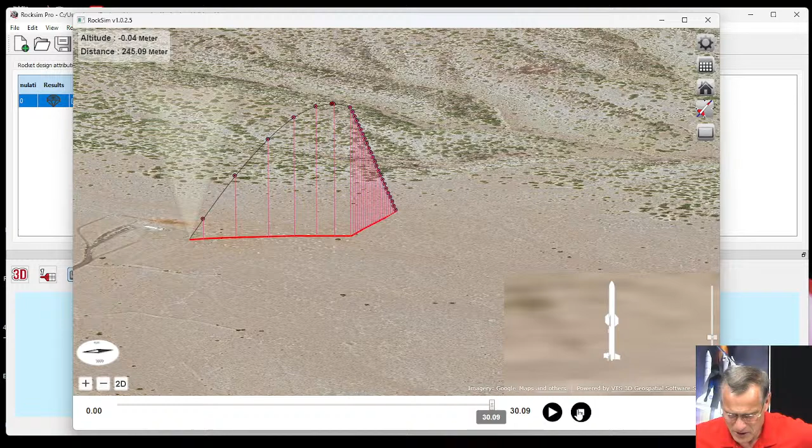So that was kind of cool. I'm going to close that. I'm going to save my design and just double check what we got going on in the chat, because we're almost out of time here.

RW says hello from Michigan and asks, does RockSim have the ability to select a piston launcher? The answer is no.

We need to figure out how much the piston launcher affects the flight of the rocket. Basically it's going to impart extra velocity at liftoff, and we don't know what that is. So that's why we can't select it, although you can in RockSim Pro and in the Launch Visualizer, our online version, where you can select a liftoff velocity.

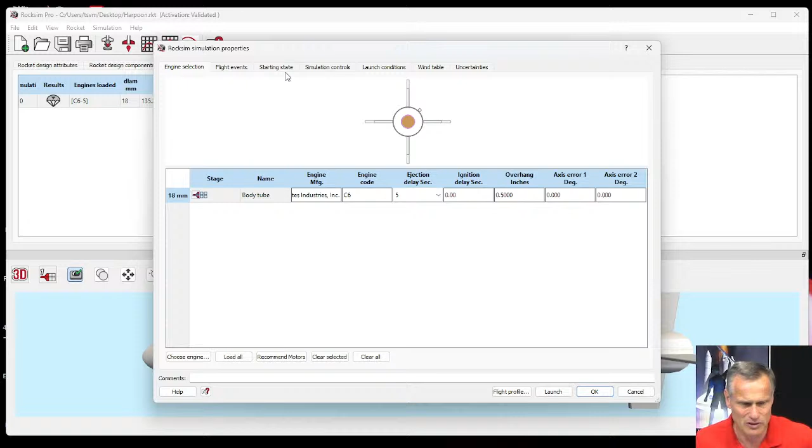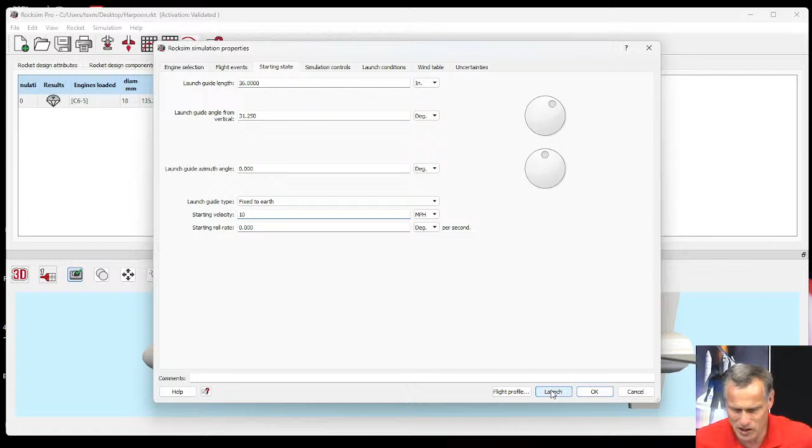Under starting state, we have a starting velocity here, so we're not starting from 0, we're starting from a little bit higher. Let's say the piston launcher was going to impart 10 miles an hour velocity to this rocket. When we launch it again, we'll see it has a different altitude. Our first one was 138 meters, our second one was 146 meters. That's because the piston launcher gave it a little extra kick.

It's really hard to estimate how much the piston launcher is going to add, so that's why we don't do that.

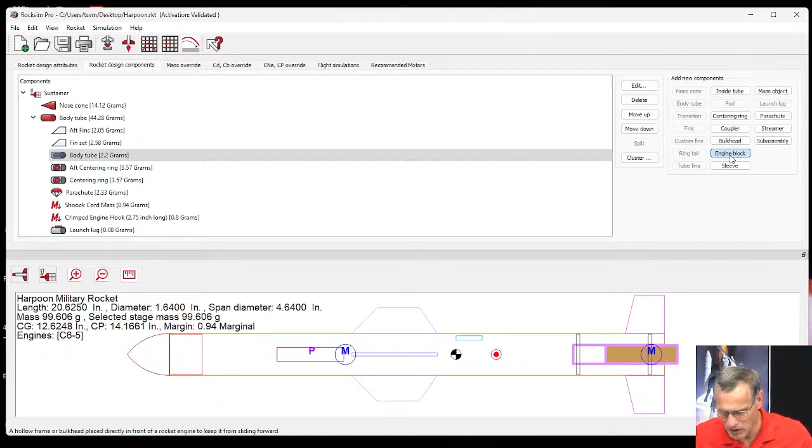I think this body tube right here is the engine mount tube. Yeah, when I click on it, it selects it. Then we're going to add an engine block right there, and we'll make it a 13 to 18 ring. Oop, I'm looking at the back. So here's the centering ring, or the engine block right now, and we just need to slide it right back here to the front of the engine and click OK. So that's how you add your engine block.

Terry Wheelock says an engine hook has an integrated engine block, an integrated block on the other end. Yeah, so that blocks it from going the other way, and that's what this was right here.

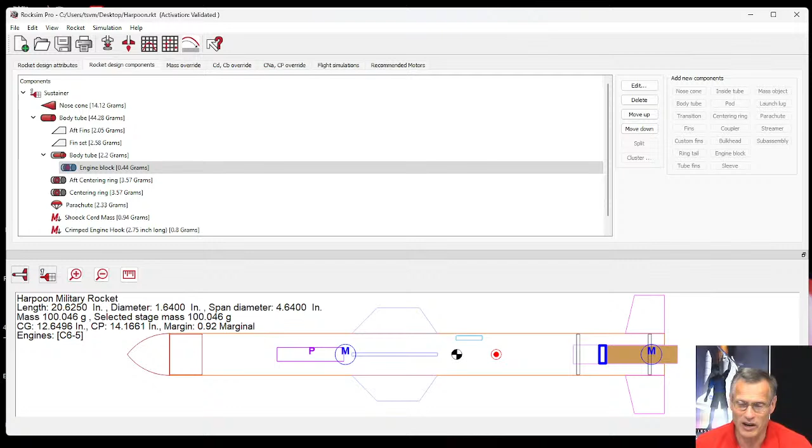RW asks, is there a reason a piston launcher is not for sale on the Apogee website? The answer is, I have designed one, I want to do one, but it requires a fiberglass rod to activate it, because I want to run the wires up through the inside of the hollow fiberglass rod, or tube, not a rod. I'm sourcing one right now, but I'm having a really hard time finding one that's not so expensive that it would put the price of this piston launcher really high. Because if you're going to buy a piston launcher, you don't want to spend too much money on it.

So that's where I am. I'm searching for a fiberglass tube, and I think I've got a source for one, but I haven't placed an order yet. If I do it, it's going to be a 13 millimeter piston launcher tube, because that's what most people use for competition. The NAR, most of their events are 13 millimeter. Doing an 18 millimeter would be possible, but I'll start with the 13 millimeter. When you get up to 18 millimeters, the effect of the piston launcher is not as great as it does for the 13 millimeter, because the rocket's so much heavier since it's bigger.